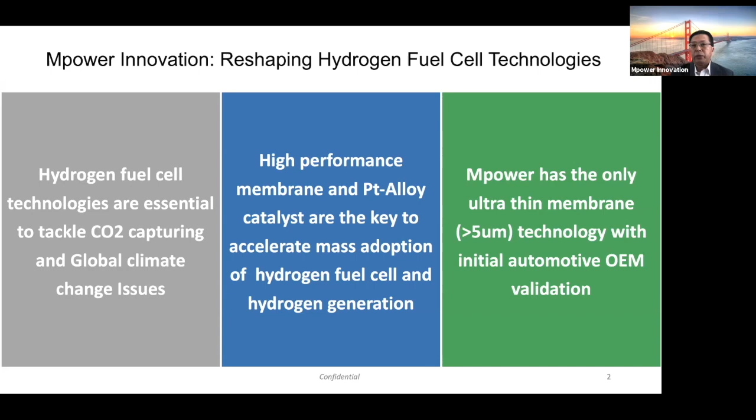One of our key validations - we believe we are the only ultra thin membrane, meaning you can generate higher power and go longer range, with initial automotive company validation.

Let me go over our company quickly. We want to be the leading company to develop the cutting edge fuel cell membrane, which is non-perfluorinated based, and also platinum alloy catalyst, meaning we reduce significant precious metal for the catalyst, and the MEA. We founded in 2019 in Silicon Valley.

The team's prior project, as Bill mentioned, was successfully funded by Khosla Ventures and SoftBank. The key team comes from Johnson Matthey, one of the leading catalyst companies in emission control as well as fuel cell, and Argonne National Lab, Nanostellar, Honeywell, and Quantumscape.

One of our exciting validations we're working on - we're already working with one of the big global automotive companies to develop our cutting edge membrane together. Recently, we secured $8 million, and a second tranche of $72 million commitment from Middle East strategic partners and a Korean PE fund. Based on this commitment, we're planning to build a manufacturing facility to produce the membrane as well as the MEA, either in the US or Asia.

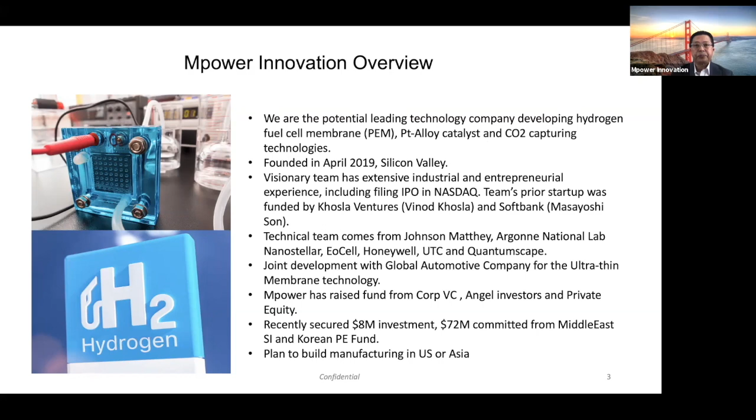So I will not spend too much time. So I'm Michael Peck, CEO, and then Dr. Ma is my founding member. He's one of the brilliant scientists in the United States to develop the nanoporous material we are using for the PEM and then the catalyst.

Bob is an ex-Johnson Matthey guy, and he has extensive experience in the area of automotive emission and fuel cell catalysts, and he worked with me at my prior company, Nanostellar. And Dr. John Shan is an ex-QuantumScape guy. He's one of the experts for the MEA in hydrogen fuel cells as well as lithium-ion batteries.

We have an advisory board. We assembled a very powerful advisory board. Like Dr. Kurt, he's currently senior VP of Umicore, and Bill Lusso is here, and Mr. Shinto was a former managing director and president of SoftBank, and actually Dr. Kim from Samsung and Andy Kim, a former senior CIA intelligence member.

So I'll give you a quick tutorial. I'm pretty sure you guys are aware of the difference between electric vehicles versus fuel cells. So a fuel cell vehicle is closer to the internal combustion engine than the EV, although they use electric motors. They use a fuel tank instead of gasoline. They basically pump hydrogen, either gas or liquid, into the fuel cell stack. And then in the fuel cell stack, you generate the power, electricity. That's how it works compared to the battery. And regarding this fuel cell stack, the key technology is the membrane and catalyst.

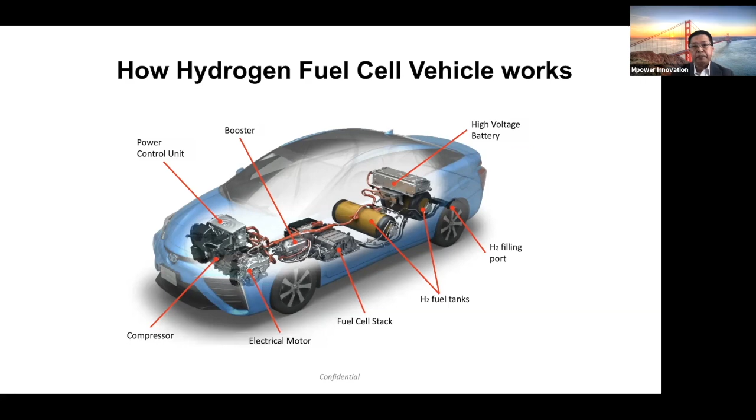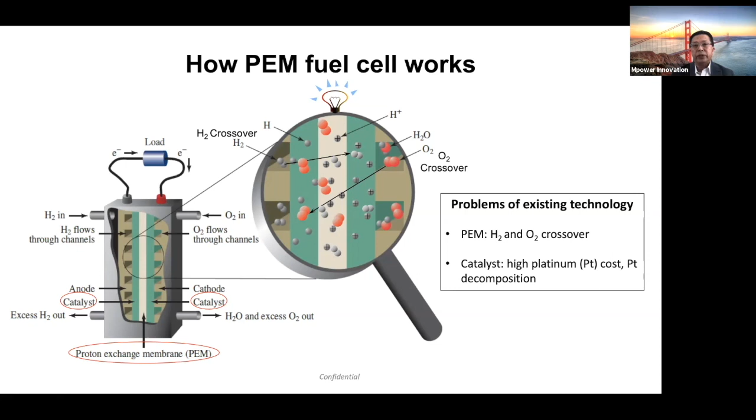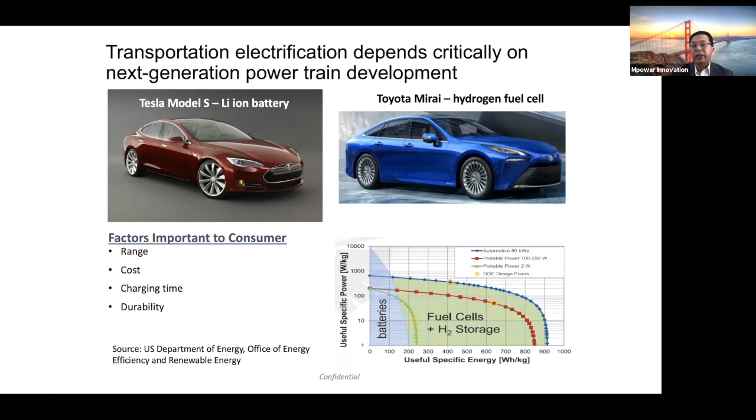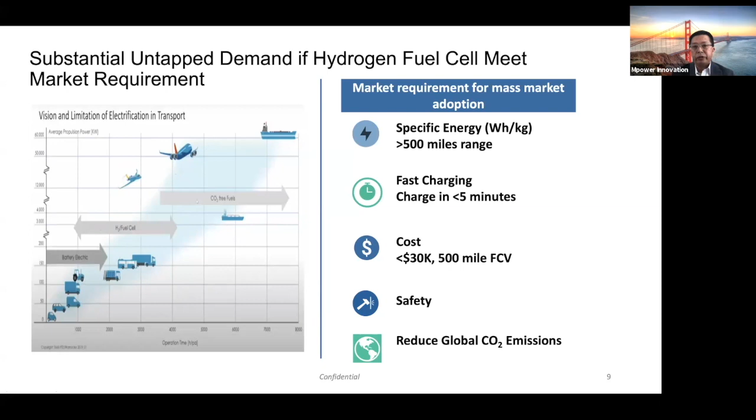So if you look at this slide, the EV battery base is more for short range, maximum maybe 300 to 500 miles. But the downside is charging is the challenge. Compared to that, for longer range like trucks, cargo, power, aviation and cargo ships, hydrogen has more advantages and strengths, and charging time is another advantage, including CO2 reduction.

Just like the lithium-ion battery, we need a thinner membrane, but the challenge is when you make a thinner membrane, the conductance has some issues, also some fuel crossover issues, and this is what Mpower is tackling, and we are making tremendous progress to improve this issue.

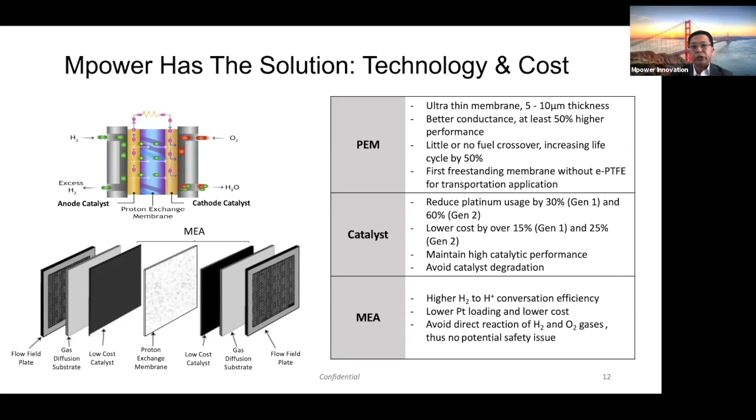Mpower is making substantial progress to compete with Gore with a different technology. We use porous nanomaterial to make it thinner. However, we can actually deliver higher conductance. Higher conductance means, just like a semiconductor analogy, higher energy density and smaller. So you can put more power within the same mechanical cockpit of the vehicle, and you can run longer.

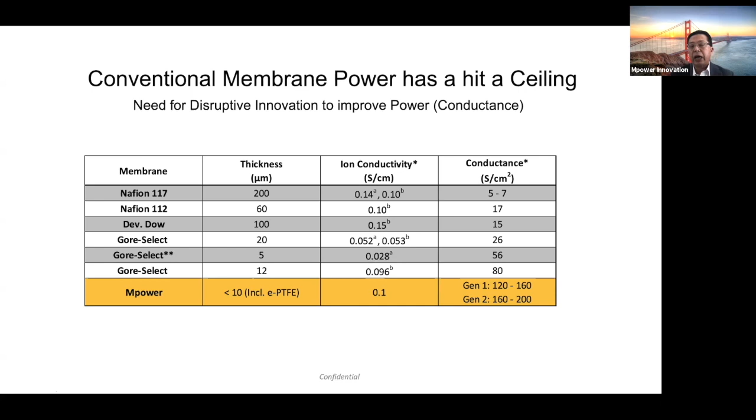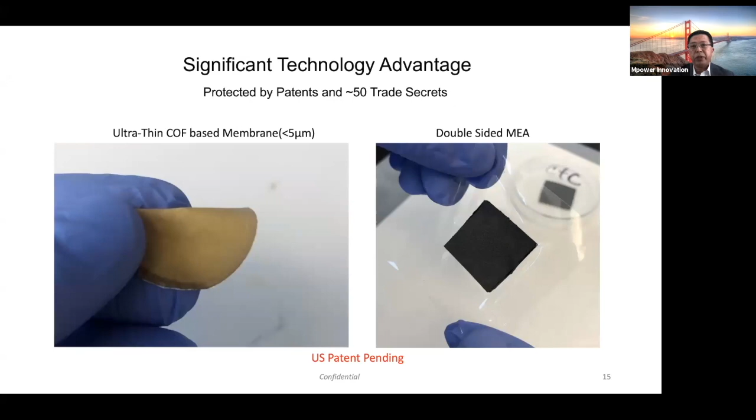So this is our validation. We are already making a less than 5 micron ultra thin membrane, and on the right side we are making the assembly including the positive catalyst and the negative, and in the middle there is a membrane. This is the core component of the fuel cell, and the patent is already protected, and we have over 50 trade secrets. I will pass on the catalyst story.

So what makes Mpower special is enhancing the proton exchange membrane to be more robust and deliver more power. We use a very disruptive nanoporous material, with which we can control or trap gas penetration, and we can make a very unique structure so that proton ion conductivity happens faster.

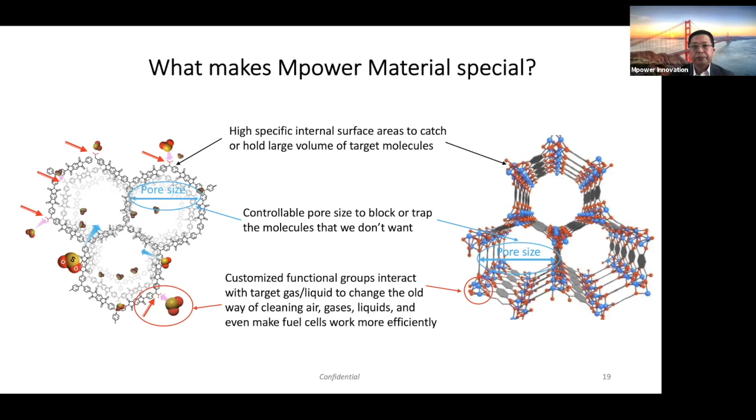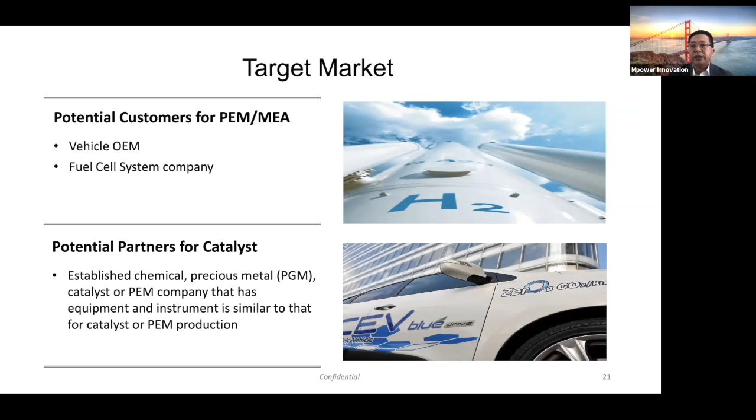Target market: currently our phase 1 is based on our PEM and membrane electrode assembly product. Our initial target will be vehicle OEM companies or fuel cell system companies. In terms of the catalyst, since precious metal is procurement related, we are working with one of the big catalyst companies. They will produce our reduced Pt catalyst and supply it to us, and they can also sell to their customers, and we earn the royalty.

So in summary, we started 2 years ago, we have raised $10 million so far, and $72 million in commitments from new investors. We completed our initial product in 2020, and we filed a very novel patent in 2019. One big validation is we are doing joint development with one of the big global companies in hydrogen vehicle production for PEM fuel cell technology in 2020. So thank you so much. This is the introduction of Mpower.

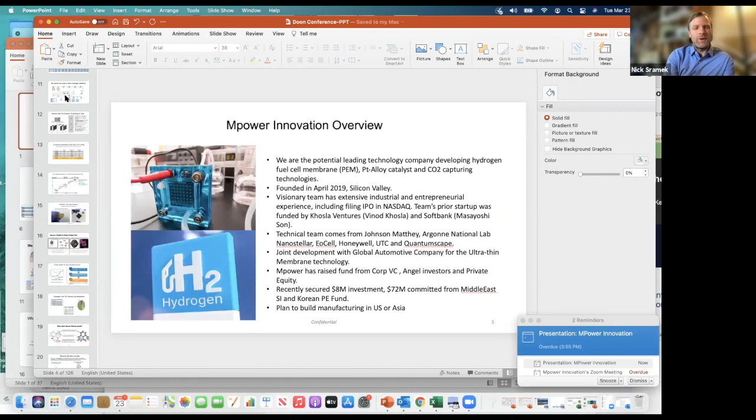Wonderful. Great. Well, Michael, thank you so much for that. Really appreciate it, and also walking through some of the technical aspects of what you do and why it's so special. When I first heard your presentation it was a little lost on me, so this was very well received. Thank you. All right, moving over to questions. Anyone from the audience want to kick us off?

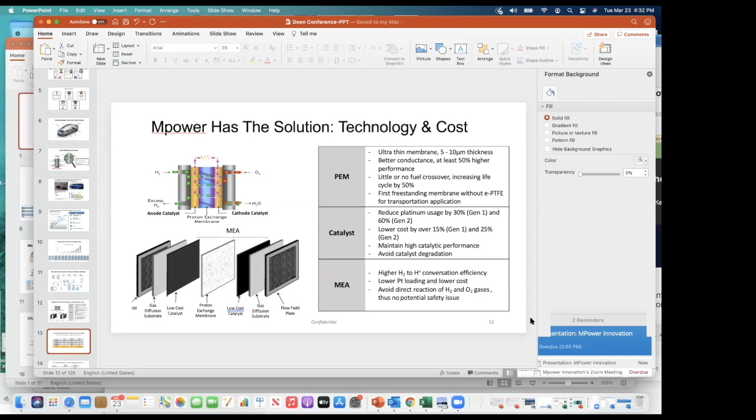Yeah, this is Chris Bailey. I've got a question on China again, sorry. I see you guys have some commercial relationships in China, no doubt Bill's team has been behind that. We do know a little bit about non-precious metal catalysts, and there are quite a few players in the university space in China working on solutions. I don't know how close they are to your solution. Just wondered if you've looked at the patent thicket and worked out if you can navigate through that, or whether there'll be licenses you have to obtain.

So the question is about licensing? Yeah, specifically in China. So your question is what the legal related issues will be? It's legal plus commercial. There are a number of players working on the same bottleneck, which is working around platinum. Actually, the big difference, if you look at this slide, we've done a lot of patent search with the legal team.

Most current catalyst companies basically use a nanoparticle approach. What we are doing is atomic dispersion, based on unique metal-organic framework technology. I'm not going to say we are 100% clean and own everything, but since we reduce the precious metal with our porous material, there is not much overlap based on our patent search with the legal team, for our due diligence with the strategic partner. That's my answer. Okay, thanks. That's impressive. Thanks, Chris.

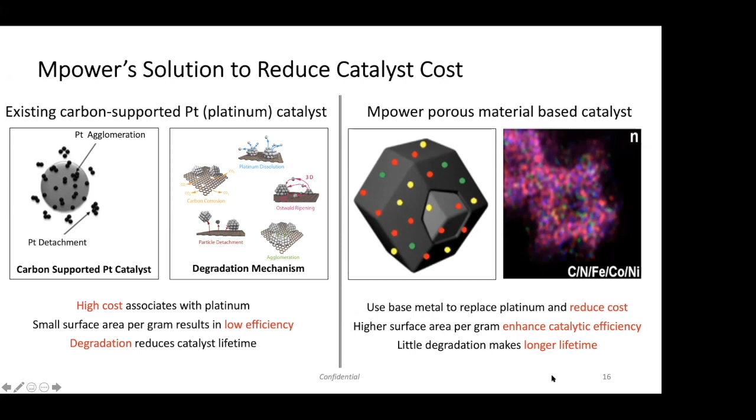Who's next? Hey, my name's Kent. I have a question about the necessary infrastructure in the U.S. to make this viable for commercial sale. I remember in the early 2000s General Motors had a fuel cell vehicle. I worked for a GM dealership at the time, and the answer we were given for why it wasn't ever really produced was a lack of interest in building the infrastructure. So I don't know if you had any thoughts on that.

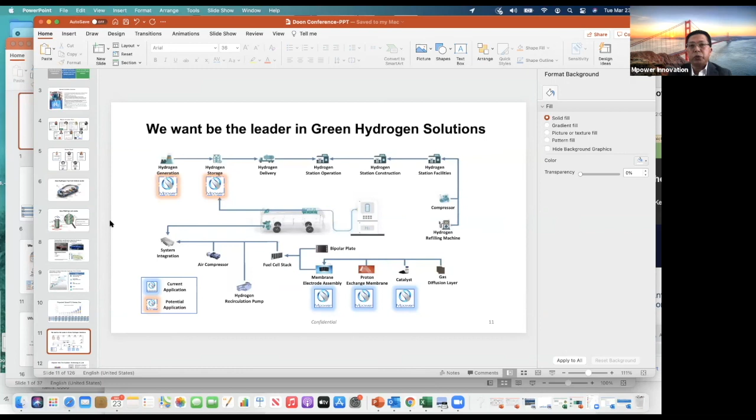My understanding is the U.S. is kind of missing strong policy from the central government. However, in the EU, Korea, Japan, and China, my understanding is that there is a big commitment, and also because the hydrogen platform is a little bit different. This is not just limited to transportation, so I will show you one slide. Is that okay? So hydrogen is basically not just for transportation; this is more like a platform

technology. If you look here, you can generate the hydrogen from fossil energy or renewables, and then you can supply that hydrogen to transportation or the chemical industry, petroleum, or fertilizer. In the meantime, you can do the reverse. Whenever you need energy on demand, you can convert your hydrogen to electricity. That's the big difference between the lithium-ion battery and hydrogen.

So in the US, the DOE is working very hard. We are kind of behind, but the other continents are moving full speed. And this market is exploding, not just because of transportation. The evidence is that production is already $150 billion, and this is not including transportation.

Now the Middle East, Korea, Japan, and Europe are heading to not only green hydrogen, but also what we call blue hydrogen. That's one of the technologies we have. We can capture the CO2 when you make gray hydrogen from natural gas or coal, so blue hydrogen is very close to green hydrogen. Since hydrogen is already being produced in a very massive way, the infrastructure, especially in Europe, China and other countries, except the US, is gearing up with big momentum. That's my understanding.

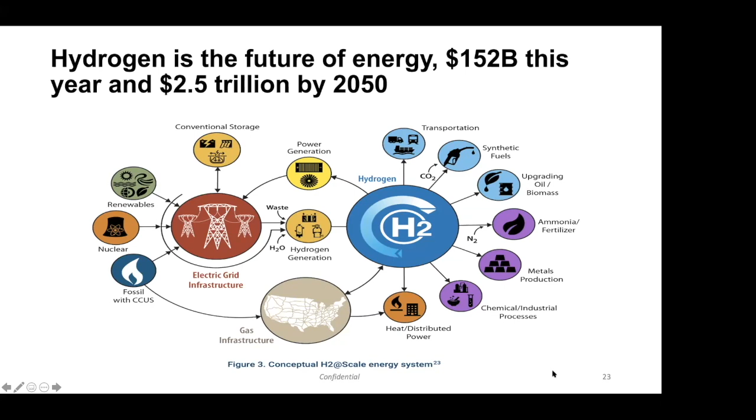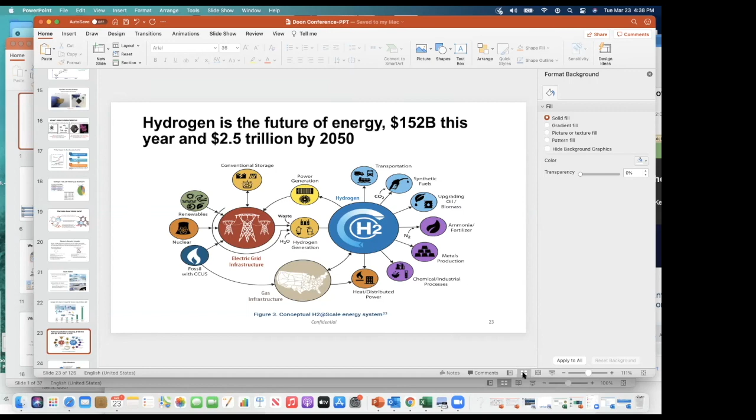David. Hi. Yeah, here in Tokyo, we definitely see the infrastructure coming in. There are fueling stations for the Mirai, but they seem to sit empty because the cost of the car is still so much more than an EV. Obviously you're working on a piece of this puzzle. How do you see the cost curve coming down because of improvements in the fuel cell drivetrain, and when do you see it catching the EVs, or do you see other advantages that will make it competitive with EVs?

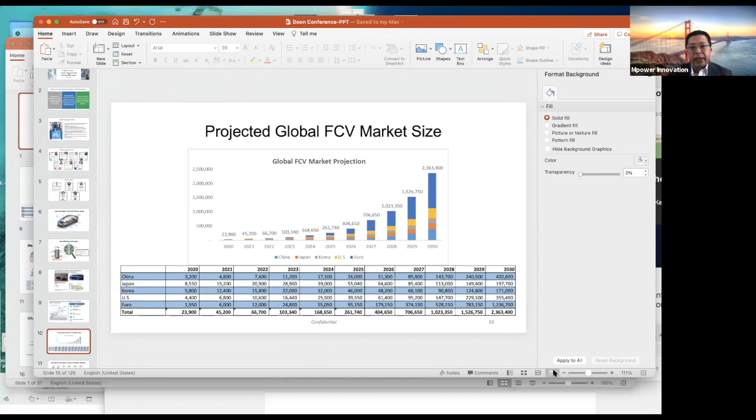So if you look at this chart, like I said, the hydrogen fuel cell is at maybe the status of EVs 10 years ago. So in my personal opinion, around 2024 and 2025, it's not that far. That's how the Tesla electric vehicle went: after they introduced the Roadster, they introduced the mass volume Model S. So around '24, '25, and of course we have to build the infrastructure, and then the catalyst,

I think a lot of companies are making tremendous progress. As long as somebody like Mpower or Gore improves conductance by 50%, which means more power, I think that will be the timing to trigger the cost reduction, and then the volume will pick up. That's my prediction.

Okay. So I'll go with you guys. Thanks. And also, how is the PVP thing? Is it okay? Do you want me to call anything? Yeah, let me talk to you about it later. Okay. I have a meeting.